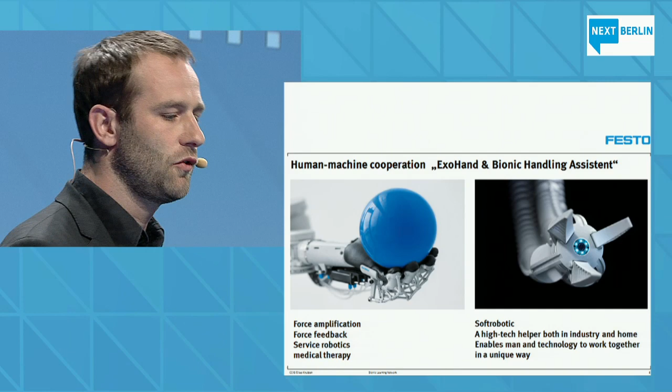The Exohand is an exoskeleton that can be worn like a glove. It is customized to fit the hand of the individual user and is manufactured from polyamide using the selective laser sintering process. For this purpose, the exoskeleton is produced on the basis of a 3D scan of the user's hand.

The exoskeletal hand has all the principal physiological degrees of freedom of its human counterpart. It thus supports the human hand's diverse techniques for grasping and handling objects. The fingers can be actively moved and their strength amplified.

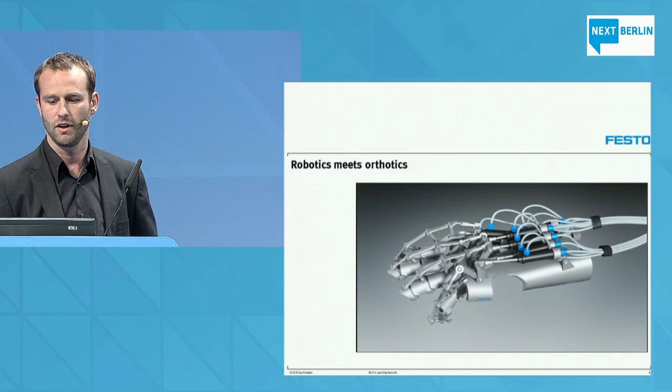The 8 double-acting pneumatic actuators attached to the structure of the exoskeleton allow the wearer to open and close the fingers. The index finger can also be pivoted to either side, and the thumb can be rotated toward the palm, just like its human model.

Since all the joints and drive units are located outside the actual hand in the form of an exoskeleton, this manual orthosis can be fitted not only over the human hand, but also over an artificial hand made of silicone. Using the same hardware enables a scenario that creates a link between robotics and orthotics in a completely new way.

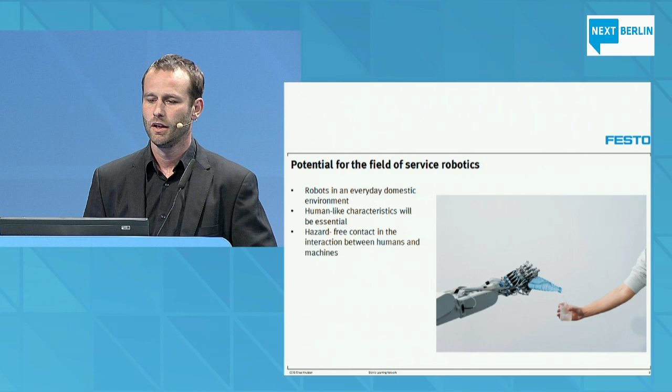So there are a lot of applications where this Exohand could be used. If, for example, a robot is to maintain its orientation in an everyday domestic environment in combination with the Exohand and interact with humans in a variety of everyday situations, the human-like characteristics of the robot will be essential.

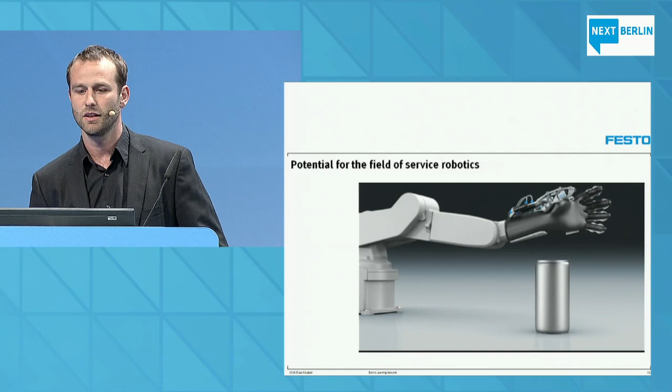The 8 pneumatic actuators make for precise movement, while at the same time lending the Exohand excellent properties in terms of yielding capacity, and thus also for safety. The lightweight construction, robustness, and powerful actuators fit best in the field of service robotics.

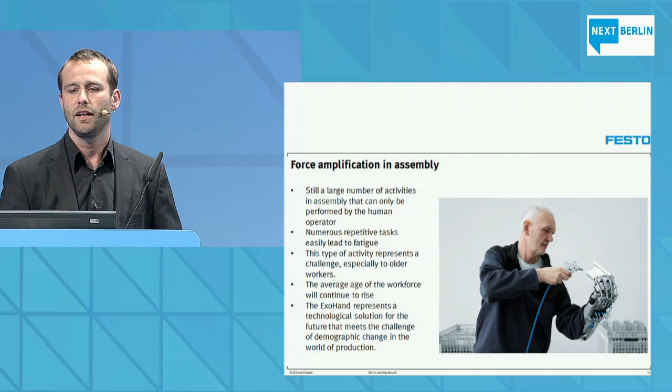Despite the high degree of automation in industry, there are still a large number of activities in assembly that can only be performed by the human operator. These include numerous repetitive tasks that easily lead to fatigue. This type of activity represents a challenge, especially to older workers.

In most industrialized countries, the average age of the workforce will continue to rise over the coming years. The Exohand thus represents a technical solution for the future that meets the challenge of demographic change in the world of production. In this case, the system amplifies the strength of the human hand and could help employees in the future remain in the work process longer without suffering permanent physical effects.

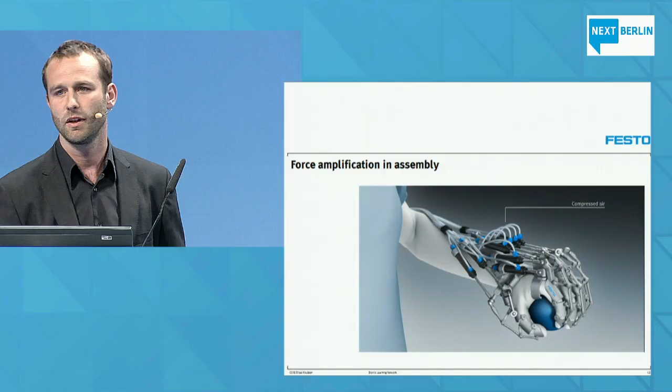So the force, we can agree, is amplified by around 20 to 40%.

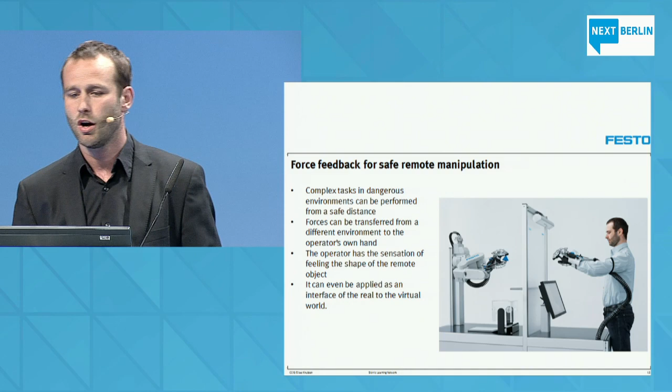When the exohand is used for remote manipulation of a robotic hand in an industrial setting, complex tasks in dangerous or hazardous environments can be performed from a safe distance. As a force feedback system, the artificial hand can greatly extend the human operator's scope of activity in a production environment. In this scenario, the exohand is fitted over both the human hand and an artificial hand of silicone.

It thus simultaneously functions both as the operator interface and the robotic hand. This allows forces to be transferred from a different environment to the operator's own hand in the form of force feedback. The operator has the sensation of feeling the shape of the remote object. You could also see this if you are interested in a live demo later in the hall.

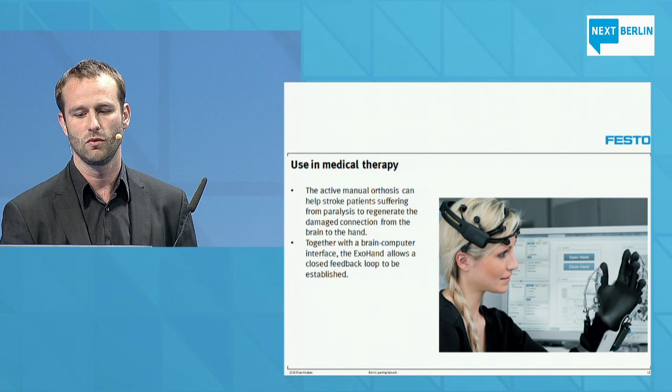In rehabilitation, the exohand can also be used as an active manual orthosis. In Germany alone, some 150,000 people annually suffer a stroke for the first time. Many of these patients must learn to use their hands once more. Together with a brain-computer interface, the exohand allows a closed feedback loop to be established. The active manual orthosis can help stroke patients suffering from paralysis to regenerate the damaged connection from the brain to the hand.

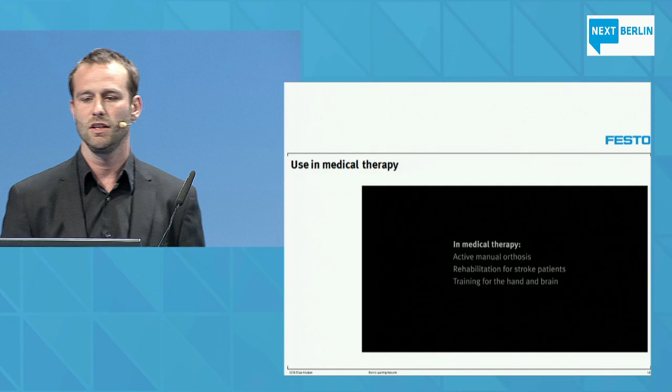The stroke patient's wish to open or close the hand is recorded by means of an electroencephalographic signal that is measured on the subject's head. The movements are carried out by the active manual orthosis. This gives rise to a training effect, which over the course of time enables patients to move their hands once more without technical assistance.

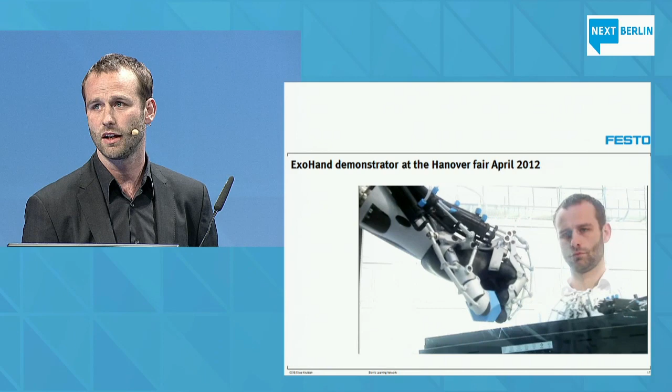So this is our demonstrator, which we presented for the first time this year in April at the Hanover Fair. As I said, we want to invite you to see this live afterwards. So there should be sound on, please. Thank you.

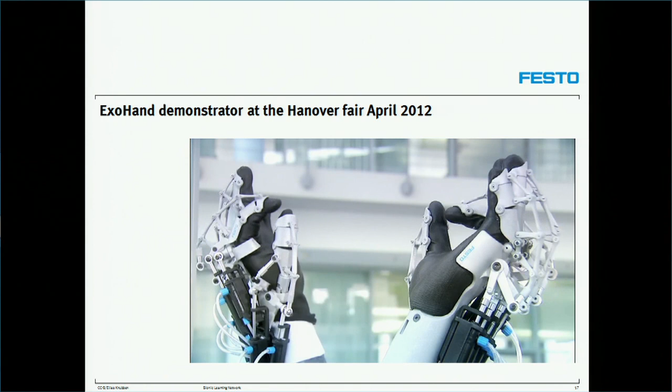I want to show you the next project. Hopefully it appears. Okay, thank you. So we have created a completely new assistant. It's not a robot, it's not an animal, but it enables humans and machines to work together without any danger in a single team. So the main innovation lies in its compliance to contact.

In the case of collision, the system's natural compliance comes into play. Firstly, because the assistant is made of lightweight plastic, we will see this later. And secondly, because it is driven by compressed air and regulated by an intelligent control technology. And in the year 2010, we won the German Future Prize, the Deutscher Zukunftspreis.

So how does it really function? The bionic handling assistant consists of 3 basic elements for our 3D movements, as well as a hand axis and a gripper with adaptive fingers. So the basic elements each comprise 3 arranged actuators.

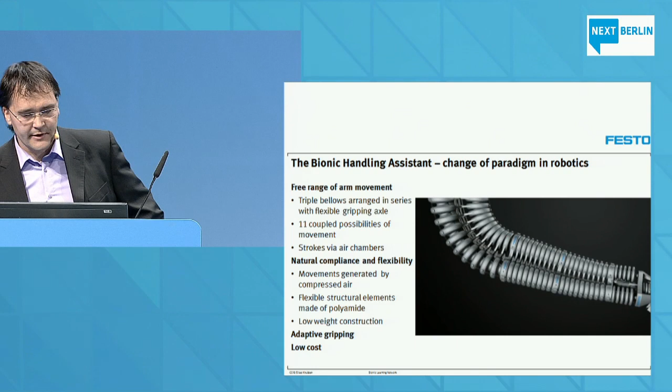Each actuator is supplied with compressed air at the interfaces of the basic elements. Resetting is effected by the bellows-like design of the actuator, which acts like a spring when the compressed air is discharged. Bowden cable potentiometers on the outside of the actuators gauge their extension and control the 3D position of the trunk. While in the hand axis, 3 further actuators are arranged around the ball joint.

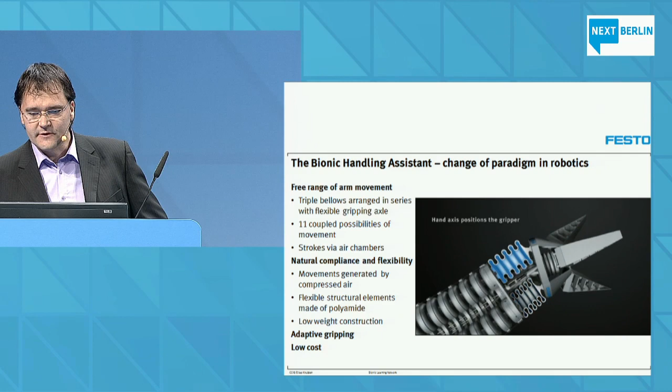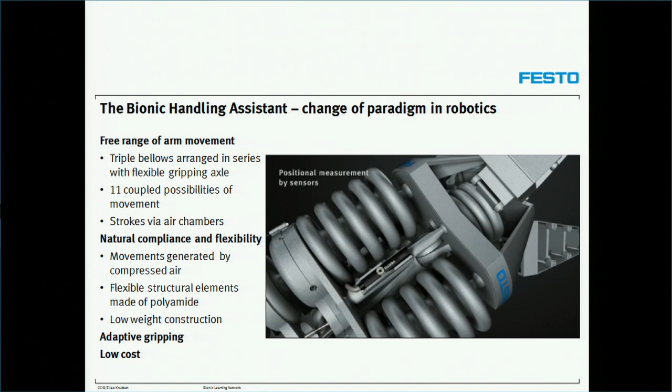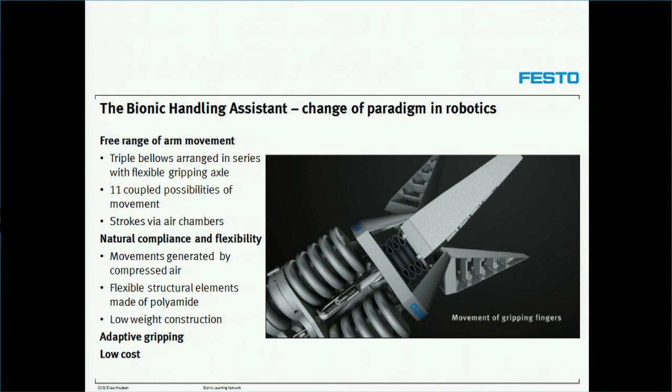Special sensors capture the angular position of those. In total, the bionic handling assistant offers 11 degrees of freedom. The adaptive gripper, I mentioned this before, named fin gripper, is based on the structure of a fish's fin. So the flexibility and compliance of the gripper, you will see this, are particularly impressive when it has to hold and move delicate objects or objects with different shapes.

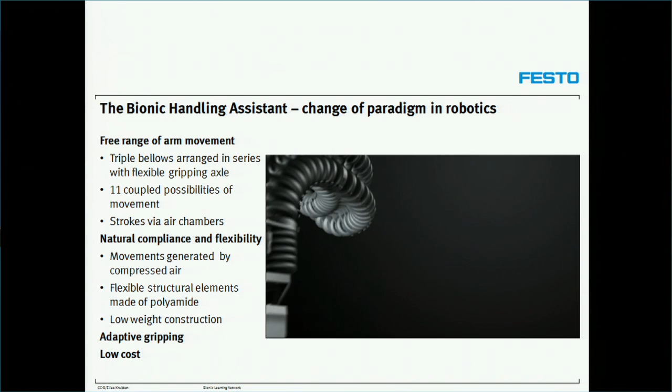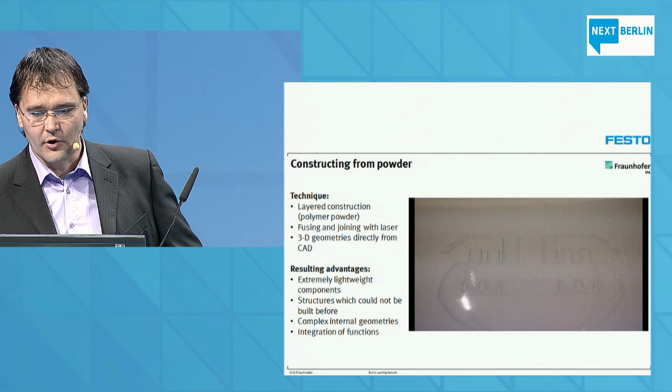Well, the manufacturing requirements for our assistant were driven by the use of the modern technology of additive manufacturing. This morning we heard about the process, and it enables the production of individual moving system parts from polyamide, which is highly flexible and has a low density.

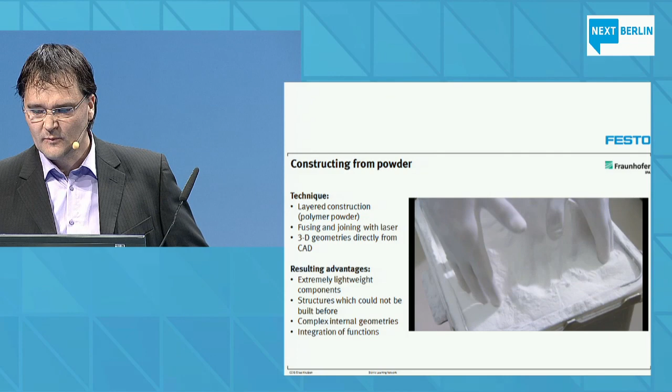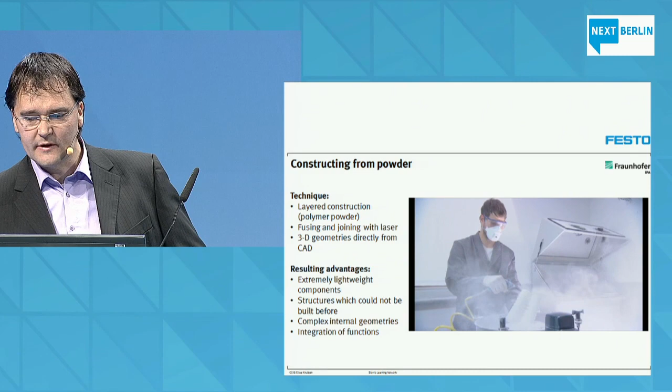Well, the compliance of the bionic handling assistant is defined by its construction, I mentioned this before, by the choice of the material, polyamide instead of metal, and by its control system. Direct contact between man and machine, whether intentional or not, therefore no longer represents a danger for humans. Even in the case of an electronic or control error, the new system remains safe due to its inherent compliance.

In view of the advance of technology and the increasingly technological nature of our living environment, the non-hazardous nature of our assistant offers completely new perspectives for research into human technology cooperation. Until now, conventional factory robots were carefully separated from humans. Safe and direct contact now opens the door to new forms of interaction between humans and technology.

The newest version of our trunk has a new interface for image and speech recognition. The system is now able to grasp objects without the need for programming or manual control. A small camera is implanted in the gripper module so it can scan the working area, detect target objects, follow them, and issue the command to grasp them.

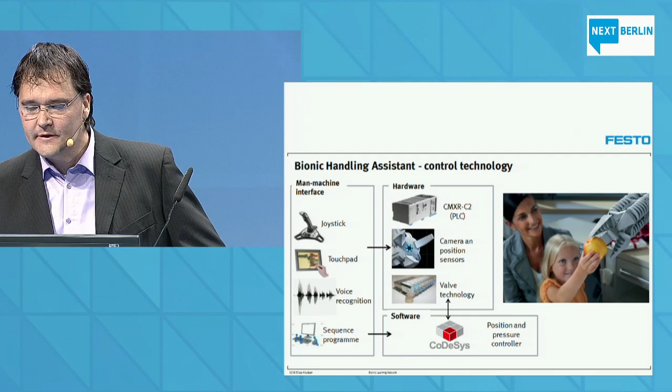For speech recognition, similar to using an iPhone or something like that, we made use of a natural interface. Some spoken commands lead the trunk to grasp and move objects.

The trunk can be used for industry and the home, wherever humans need non-hazardous support from machines, for example in medical technology and as an aid for the handicapped, as well as in agriculture, private homes, and educational institutes. In industrial environments, our bionic handling assistant can be used as a handling system to support assembly processes.

During further development, we designed a compact version of the trunk, installed on the mobile learning system called Robotino. It allows the mobile robot to grip and transport objects. The robot can be moved flexibly, and the adaptive gripper can be aligned precisely using a gamepad.

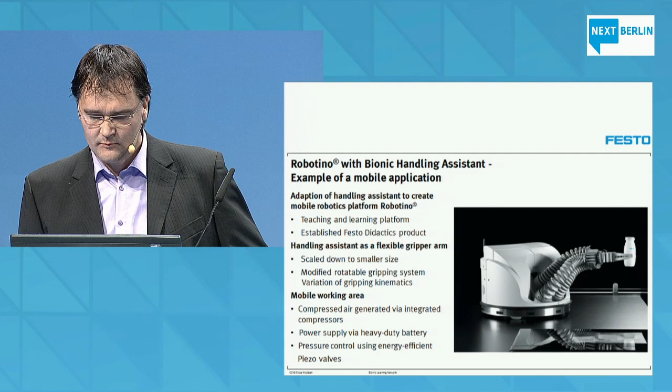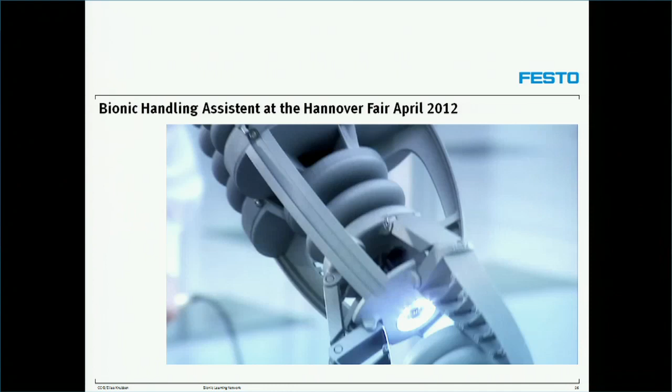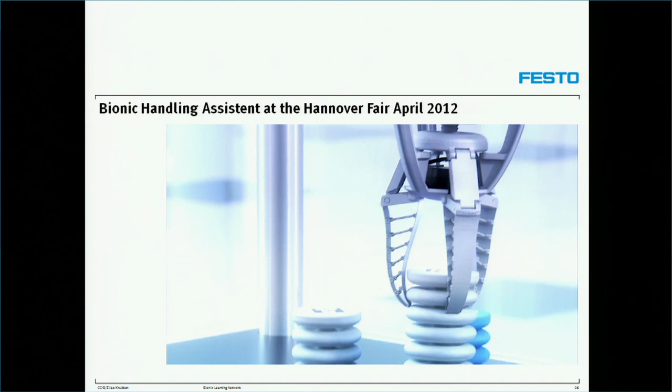Please turn the volume on. Show me your workspace. Pick tool number one. Open gripper. Go to home position. Pick tool number two. Follow object one. Go to home position.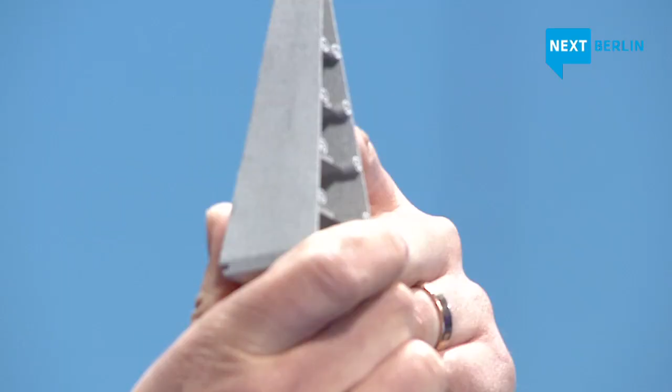It's our fin gripper, it's like a fish fin. What you really see is, if I put any force into the gripper, it does not bend in the direction the force comes from, it bends against it instead. That is really a product, so we can sell those for maybe agriculture robots or so.

But the whole arms and so on, the bionic hands and things like that, as a single unit - will I be able to have one and link it to my laptop? We will sell them quite soon. The Robotino, the small robot with a small trunk on it shown at the end, is a product we sell through our didactic company, especially for universities and schools, and students can learn programming with C#, LabVIEW, and all kinds of programming languages.

We've sold this for years already, for around 4,000 euros. Now we combine this with the trunk - this will cost a little more. I don't know the price at the moment, but we'll sell it by the end of the year maybe. So it's easily affordable for a couple of people getting together.

One final thing - all your products over the past few years have been biomimetic, inspired by nature. The trunk, the flying penguin, all those different things. What's next, what are we going to expect from you next year? Can you give us a hint, what species are you going for? Is it lions? Is it horses? Is it amoebas?